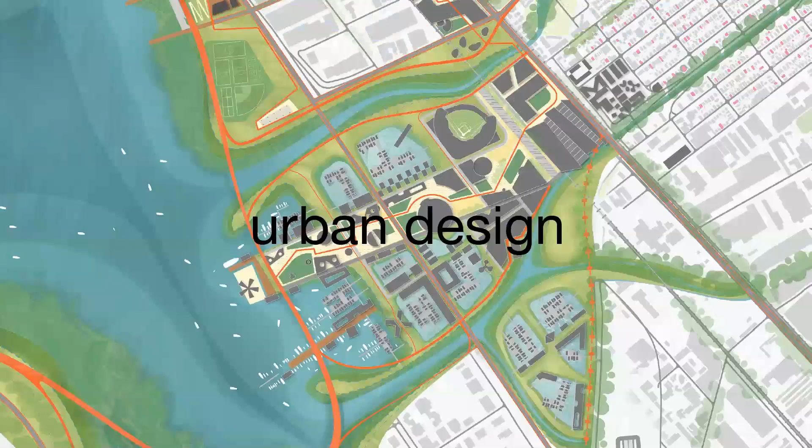Urban design, we like to look at sort of the overall urban scale as well as the building scale. We have an interiors practice. This is a cafe that we did at the Facebook campus in Frank Gehry's building. And we have a small fabrication shop in our Oakland office where we build things. So we do, these are prototypes for a hotel refresh that we were doing on one of the hotels that we designed about 15 years ago.

In addition to that, we have what we call DBA Lab, which is kind of all of our pro bono and experimental projects. This is a temporary installation on the site of an affordable housing project that will eventually be here when they get financing many years from now. But in the interim, the nonprofit that we were working with wanted to activate the space, and so they created a market and a stage that they have events every couple weeks. And the idea was that the market spaces would be used as incubators.

So people in the neighborhood who have ideas for restaurants or other businesses could come and try them out, and then eventually, hopefully, when the building gets built, there'll be a place, a sort of a locally grown business that can go into the retail spaces.

And one of the places that they kind of started working with here, they own the building next door, which is the California Hotel, which is also 100% affordable, permanently supportive housing for formerly homeless. And it has retail on the ground floor. And one of the businesses that started as part, that they kind of connected with as part of this, was so successful that they moved into that ground floor retail, and there's a restaurant right next to the site now, which is great for this part of Oakland.

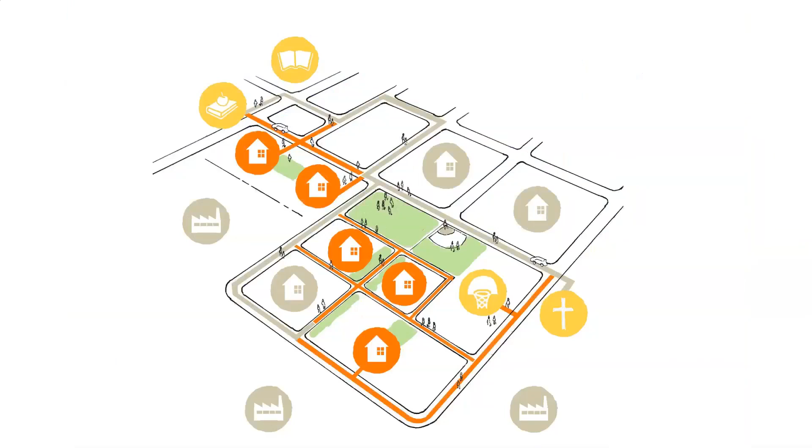I'm going to talk a bit more about this project - a 7.5 acre project in Oakland with the Oakland Housing Authority. It was redevelopment of an existing 88 unit project; we doubled the density and expanded the land. This site has a new library and a new school off to the left, and down on the bottom right there's a rec center and a church, and the housing connects the two. Oh, and a park.

So there's this opportunity - the project isn't just about replacing this really dilapidated World War II housing and turning an old pasta factory into housing. It's also about thinking about the neighborhood.

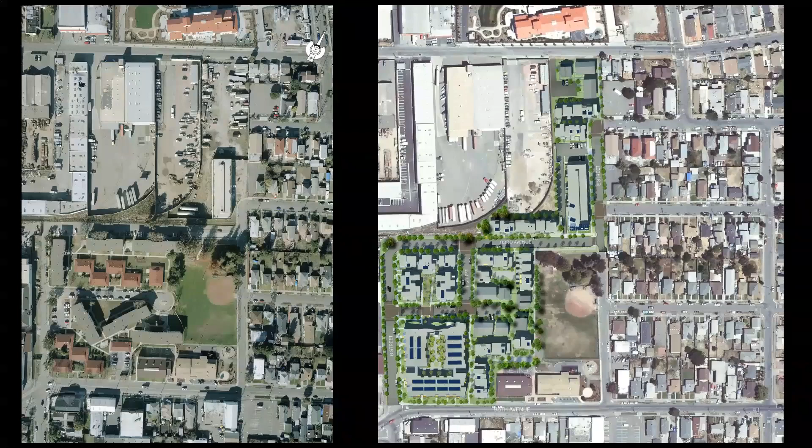So at the end of the day, this is a rendering of our final site plan. We created all these pedestrian connections where we actually created a bit of new street. If you were driving, you could get there more directly, but there's also a pedestrian connection that brings everybody so that all the assets of the neighborhood are available to the residents. This was before - a broken, gated community where the gates never worked - and at the end of the day we created these pedestrian streets where kids can play and ride their bikes and get from the park to the rec center, over to the library or the school.

The second one, make big moves, is pretty straightforward. Affordable housing is super challenged budget-wise - we always end up in value engineering, cutting all kinds of things out of it. So this is about the idea that if you strip away all the bells and whistles, all the nice materials, the trellises, the balconies - is it still something that stands out and has a presence as a really great building? That's the idea of making some move that you don't have to rely on beautiful detailing, excellent construction, wonderful materials, which we'd all love to do as architects, but that's not necessarily in our palette on these kinds of projects.

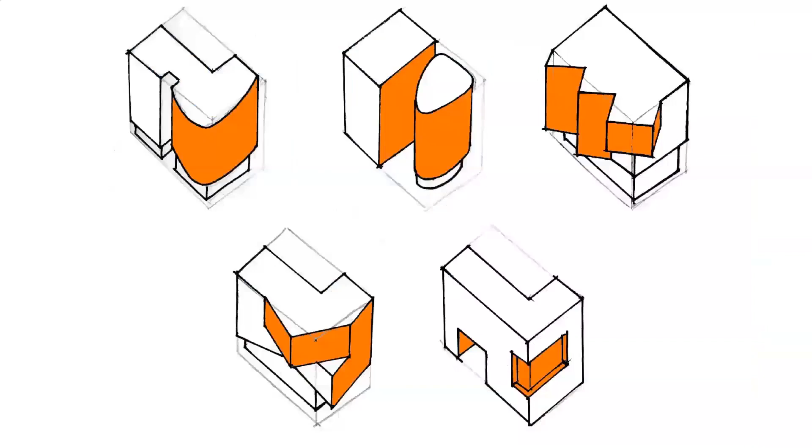Here are some diagrams of different projects and what those moves look like. This is an affordable senior housing project in Oakland with a really tough southwest facing facade, so we took advantage of that and played with the windows and some sun shading to come up with something different. There's a project in Sacramento where we took an exterior stair and bent it, wrapping it in a material to give it some presence on the street, regardless of what got cut out of it.

This is a project in Union City, sort of the suburbs of the Bay Area. We created this portal, this double height space you walk through to get into the apartment building, to the front door. It has this really wonderful grand scale. Even if you end up losing it, it's just stucco painted different colors - it's not like we have anything wonderful going on.

Similar project, this was in the Bayview in San Francisco. We worked with a community group really interested in Afrocentric design, and one thing they honed in on was that Afrocentric design shouldn't be rectilinear. So we're like, well, most of the building has to be rectilinear - we can't afford to have the whole thing be curves. But can we have a moment where we do something sculptural and unique that stands out as completely different?

So this is that project. You've got the whole frontage as storefront, but then residential comes down to grade around the perimeter. How do you deal with all these different conditions? Retail is an obvious one, that's easy. This is a project in San Francisco where there's no way we could possibly support retail, in a neighborhood that doesn't have that kind of pedestrian traffic.

So we have all this common space though, with offices and other things, and we could design them to have that feel, to have the same sort of scale and proportion as retail, maybe throw in a little interest with color, so that as you're walking by it still has that public realm, civic scale to the building, even though you're basically looking into the property management offices.

Sometimes there's residential on grade, and so how do you interface with the public realm when it's somebody's apartment? Giving them a buffer, stoops, like retail, are a really easy answer—we'll just put a stoop there. But stoops are also really hard to do well, they're really easy to screw up.

This is a courtyard in an apartment building that we designed, and on the ground floor there's a community room, and then on the upper floor there's this walkway with a whole bunch of activities. There's laundry and a lounge, and they each take up a little bit of space along there, but they're all related to each other.

So no matter whether you're coming down to use the barbecue or whether you're coming there to do your laundry, you bump into your neighbors, you connect. So it's really just aggregating all these uses and making them nice spaces to be, not just sort of left over in the corner where you had some extra square footage.

This one actually sort of didn't work as well as we hoped. We had this wonderful idea that there would be this grand stair connecting the second floor to the ground floor so that you would walk through. And our local disability advocates didn't feel that that was equal facilitation for people in wheelchairs, even though there is an elevator, but you have to walk into the building, use the elevator, and come back out. That wasn't good enough. So we had to take the stair out, which is kind of sad, but it would have been really great if the stair was there.

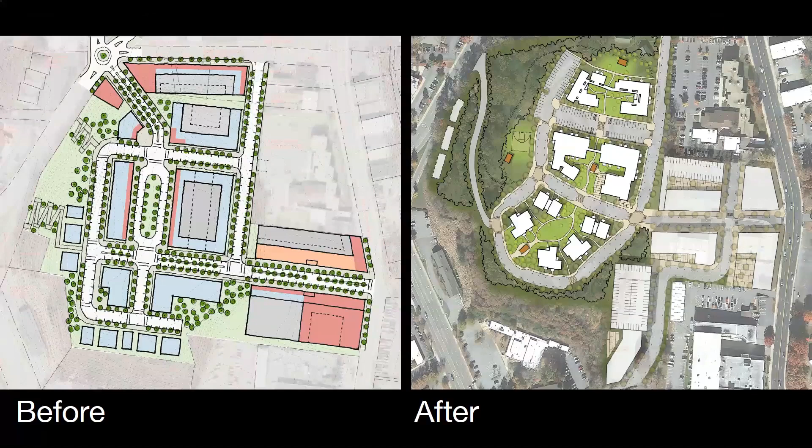And that humility, and just being honest about the fact that we don't really know a lot, is a critical part of making sure that you design buildings that are of a place.

So one of the tools that we have to really engage people is community design charrettes, where we actually engage with people and try and get them to design their neighborhoods.

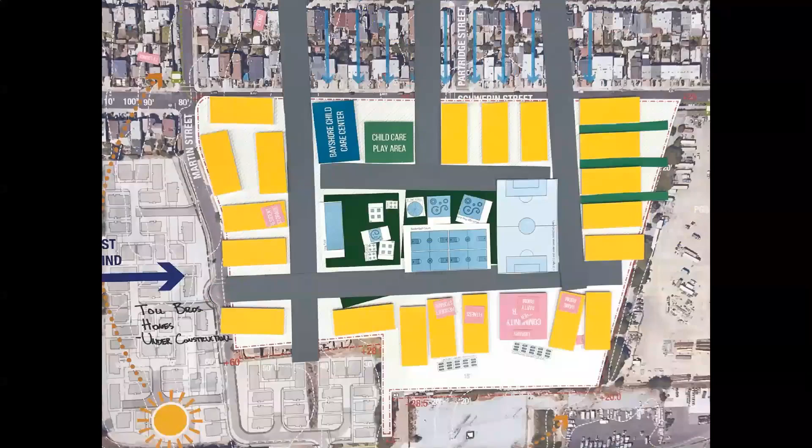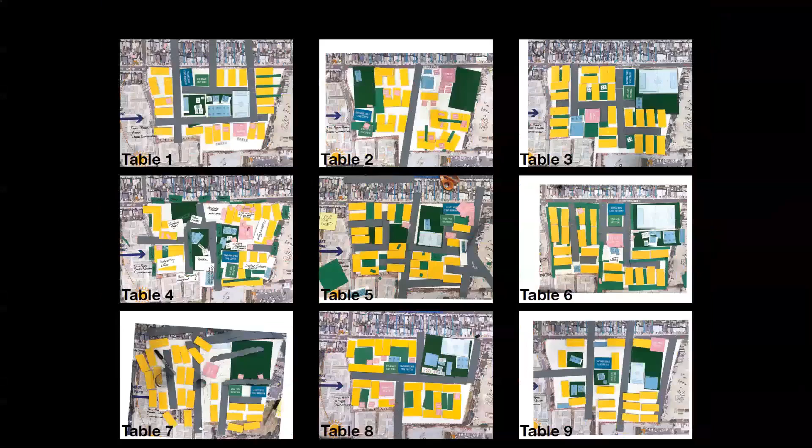So this is a different project. This is in Daly City, right near San Francisco, where we were redeveloping 15 acres and putting 500 units on a site that had 150, with the city park. And so here we had tables and we worked through with people, and these are all the different things that folks came up with. This kind of amazing array of different ways to organize the site and lay it out. And then we diagrammed that to understand what were the connections and where were the green spaces and where the housing went.

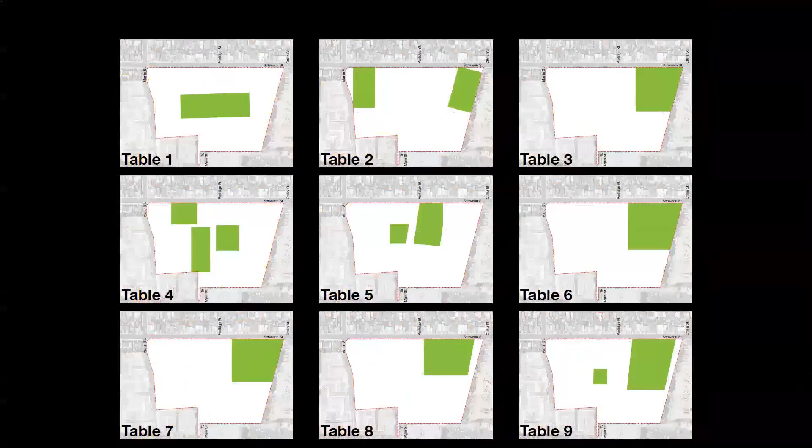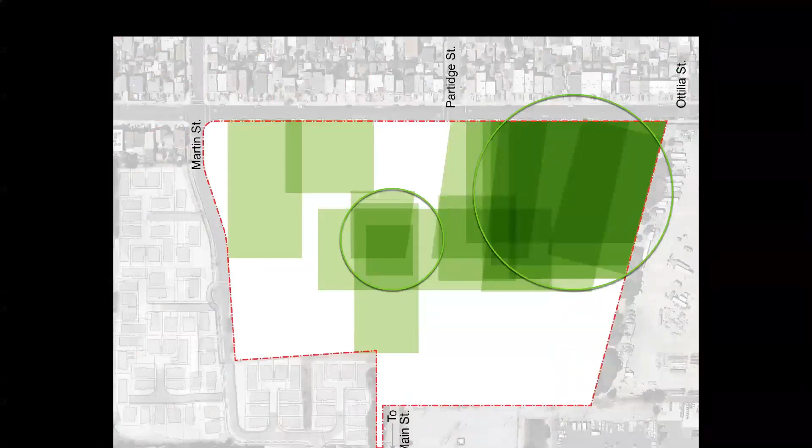So this is just an example of what we did when we were talking about the green space. We overlaid them on top of each other and we're like, oh, well, it's clear the park belongs in that corner of the site, right? And when you're meeting with other stakeholders like the city or the housing authority or whoever else is involved in this project, and you can show them this process that you went through, where you extracted from the neighbors what they want out of their neighborhood, it's amazingly powerful, and it ended up being instrumental in getting the project approved.

So let's say we've gone through that process, we've built the building. How do we give people an opportunity to make their own little stamp on where they live? One really simple thing to do is just give people a little shelf by their front door so that they can put things out there.

What's really funny about these is that they start off empty, nobody puts anything out. And then it's kind of contagious. One person puts their pot out there, and then everybody's like, oh yeah, I can put my pot out there too. Then somebody has a picture of their grandchild, and everybody has pictures of their grandchildren. It's this great social connection where you have to have the person who starts first, but once they do, it really takes off and people go crazy.

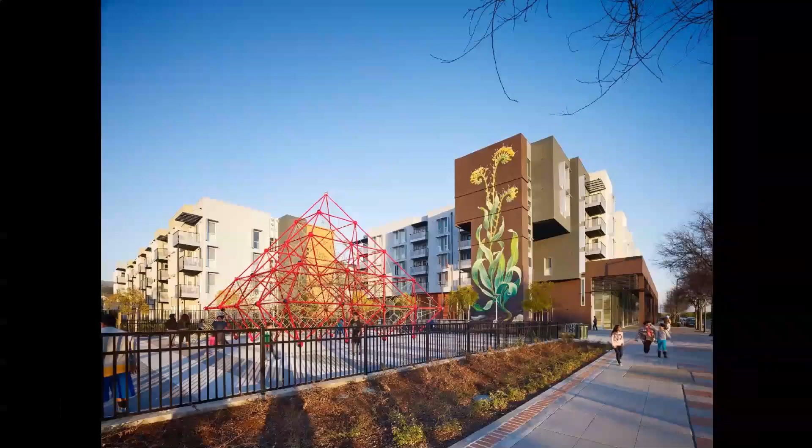This is another project, again commissioned art, which is more straightforward, in a project in Union City. We worked with an artist who got really enamored by this thing, which to me looked like a weed, but apparently is a native plant that's rare. She decided she wanted to do an 80-foot tall version of it, which at first I was a little skeptical about, but it's actually this pretty wonderful thing.